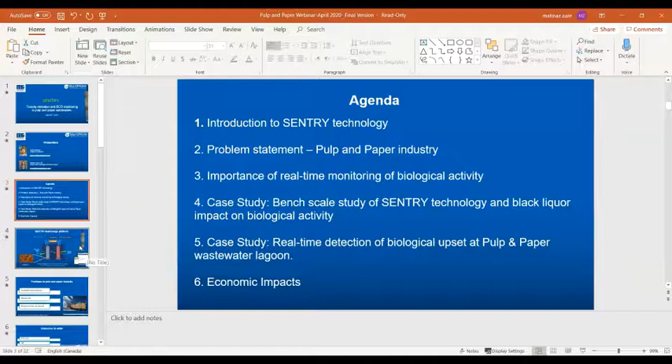So Sentry is a bioelectrochemical system in which power is applied to the system. It has anode and cathode parts. And they are measuring MET, which is the real-time carbon consumption data. The MET data is sent to a live dashboard, and the client has access to the live dashboard. So the redox reactions, oxidation and reduction, are happening at the anode and cathode, and they are producing MET data.

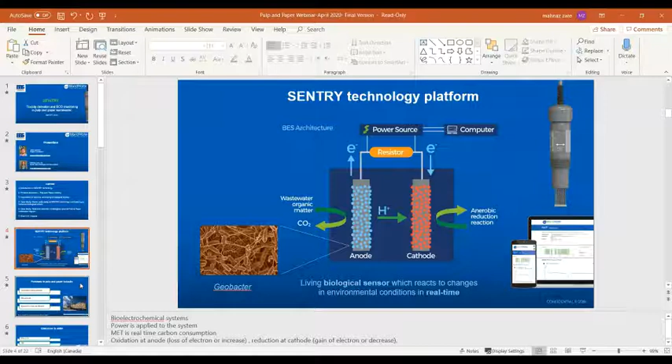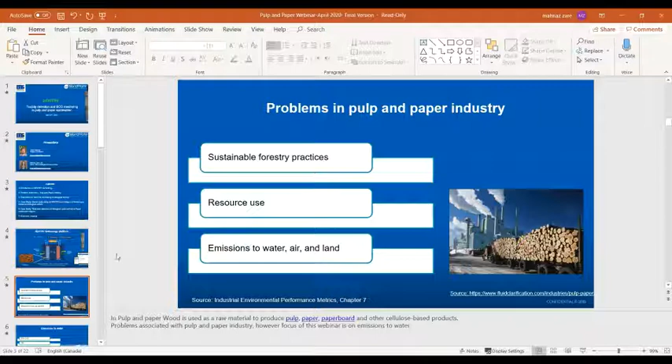In this webinar, we are focusing on the problems associated with the pulp and paper industry. In general, in pulp and paper, wood is used as a raw material to produce pulp, paper and paperboard and other cellulose-based products. But there are 3 general categories of problems that need to be addressed, including sustainable forestry practices, resource use, and emissions to water, air, and land. In this webinar, we are focusing on the emissions to water and the wastewater treatment industry in pulp and paper.

Pulp and paper receives water from a variety of sources in the mill. The processes include pulping, which is producing methanol, power and recovery, which is producing black liquor and turpentine. Another step is bleaching, which is producing caustics, acids, and color bodies. And the paper machine process, which is producing fiber and starches.

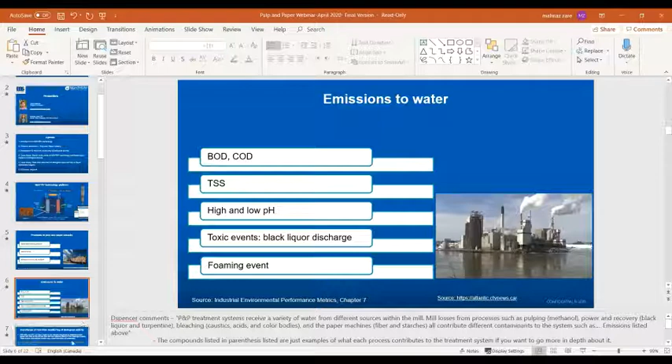All of these processes contribute different contaminants to the system. These are usually measured as BOD, COD, TSS, high and low pH, toxic events including black liquor discharge, and foaming events. So it is very important to control the wastewater and the contaminants that are going to the environment.

However, pulp and paper mills are running 24/7 throughout the whole year, so it's virtually impossible to find out when the issues are happening in the process and if these issues are having an adverse impact on the treatment system.

In order to run a successful and steady biological process, it is important to monitor the 8 growth pressures, including food, such as BOD, pH, temperature, dissolved oxygen, nutrients such as nitrogen and phosphorus, retention time, toxicity, and the health of biomass. However, the known and unknown events may cause variation of the characteristics of wastewater, and these changes can add additional costs up to $200,000 to the treatment system.

Some of the additional costs include supplemental nutrients, bioaugmentation, or adding other products to help avoid potential BOD breakthrough to the effluent stream and violating permit discharges. However, currently there are limited tools available to monitor the biological activity within the wastewater treatment system.

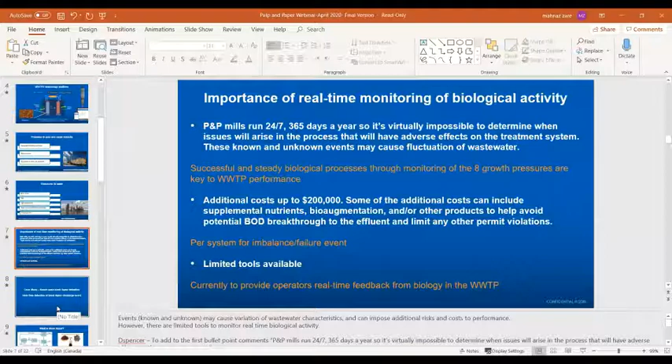Sentry is one of these tools that is helping to monitor biological activity in real time in wastewater treatment. And in this webinar, we are presenting 2 case studies that have used Sentry. The first one is a bench scale liquor detection, in which EBS used Sentry to monitor detection of black liquor discharge in their lab setting. So David, it's to you.

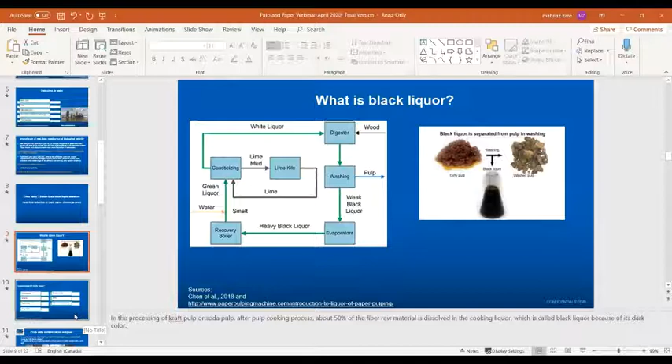However, some of the recovery processes don't always work as planned, and accidentally liquor can end up entering the treatment system, which can have some profound effects on the health of the biology and the overall treatment capacity. Some of the components of the black liquor consist of wood lignins, tannins, resin acids, fatty acids, excess sodium, sulfur, and a variety of other toxic compounds. It's highly caustic and is characterized by high inorganic and organic loads. And because of that, the spills can often cause a period of upset conditions and potentially push the BOD beyond your aeration capacity in the system, leading to permit violations.

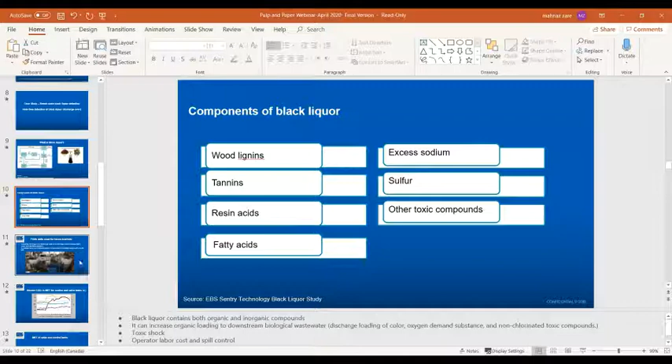So for our bench scale analysis, our overall goal was to quantify the impact of the black liquor spill on the microbial electron transfer compared to what we were normally getting, and also to validate Sentry as a real-time solution to detect these extreme loading swings, such as black liquor spills or any other spills that may occur.

So to achieve this, this is our setup we had in the warehouse. It was two tanks filled with 25 gallons of pulp and paper wastewater. They were fed a flow of approximately 12 gallons per day, so we're roughly at a 2-day retention time under aeration. We ran this setup for approximately a month before starting the trial. And each day we consistently ran total and soluble COD and BOD and compared it to the METs to get a baseline of what normal was.

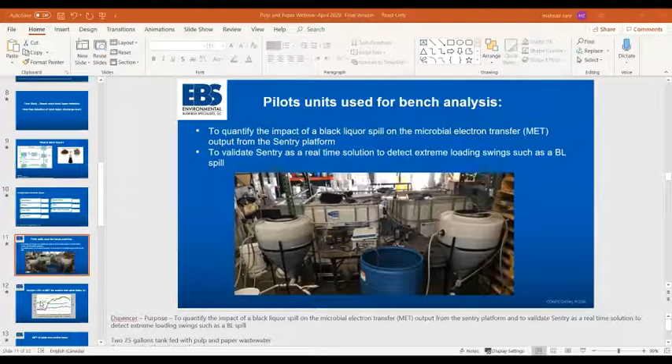So once we established that portion of the analysis, we added weak black liquor from the same paper mill that we would get the wastewater from, just to see how it would compare to the control tank. So we fed black liquor to tank A, and the control remained the same, normal loading, normal flow as it had.

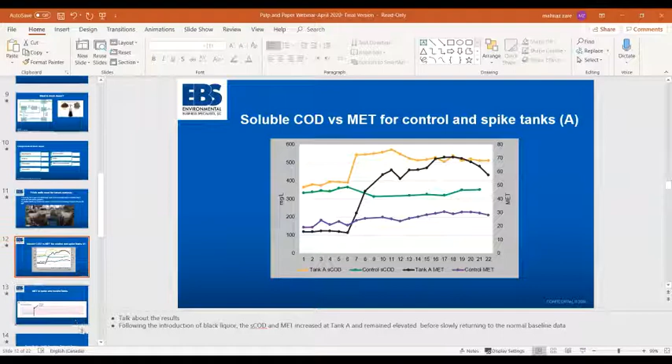And as you can see on this graphic, tank A is the orange. So we ran CODs, and almost immediately, as soon as we spiked the tank with black liquor, you saw a sharp increase in both the CODs and the METs, which indicated it responded well to the increased loading from the black liquor. It remained elevated for a few days and then slowly declined. In comparison, the control tank, which nothing was done to, remained relatively consistent.

This next graph is the dashboard view, and you can see where the dosing event was. The line in blue is the tank that was fed with the black liquor. And as mentioned earlier, you saw a pretty immediate spike, indicating that there was some higher loading coming through, whereas the control remained relatively stable. And then after a few days, the spiked tank eventually came back down, whether through retention time or the black liquor being degraded, back within the stable readings.

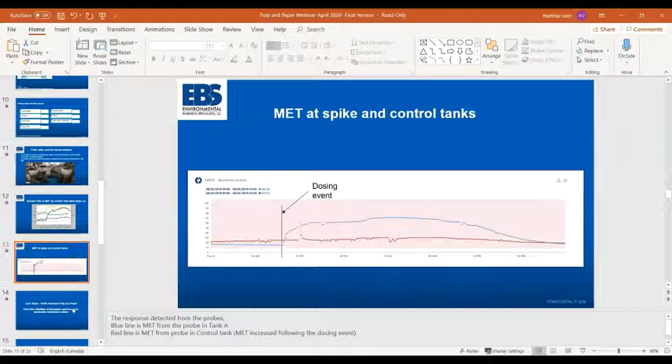So the second case study with Sentry was to monitor real-time biological activity in the lagoon, and to see if Sentry can be used as a real-time detection to help operators detect biological upsets at the lagoons. The base mill is located in North America.

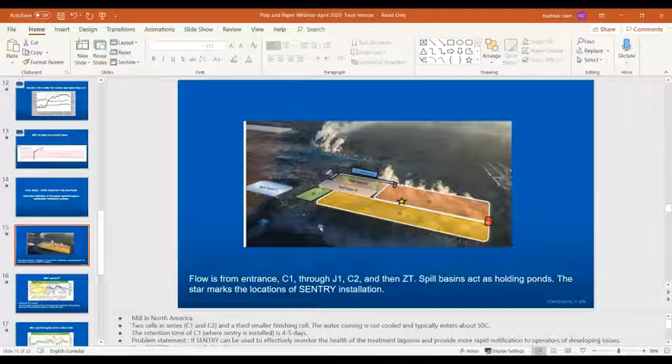The picture is showing the aerial view of the wastewater treatment. There are cell C1 and C2, and ZT. The water is flowing from C1 to J1 and then C2 and then ZT, which is acting as a smaller finishing cell. There are 3 spill basins, spill basin A, B, and C, which are acting as holding ponds. The star here is showing the location of Sentry installation.

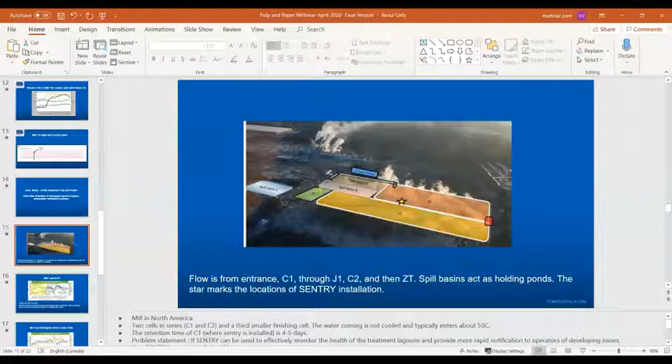C1 and C2 are in series. The water which is coming to the lagoons is not cooled and typically enters at around 50 Celsius degrees. Only one Sentry system is installed at C1. It has a retention time of 4 to 5 days. And as mentioned earlier, the problem statement was to see if Sentry can be used to effectively monitor the health of the treatment lagoons and provide more rapid notification to operators about developing issues.

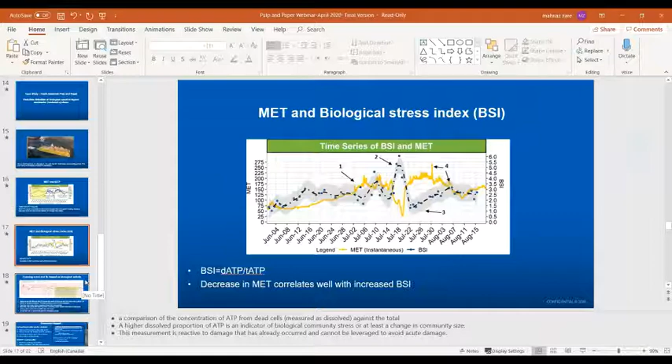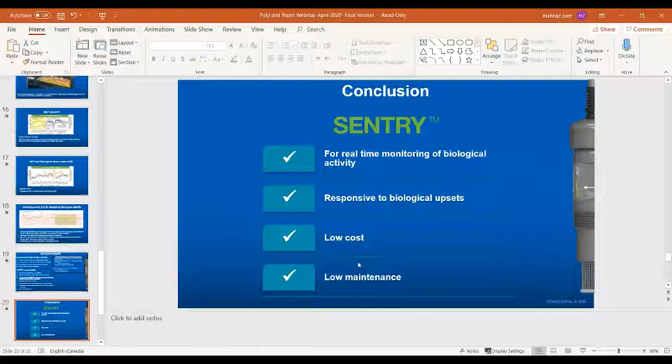So I'll maybe just try and quarterback the questions and the next steps. I will summarize briefly to remind people of what we've gone through. So generally speaking, the pulp and paper industry has massive issues in having to deal with wastewater. The wastewater generated at these pulp and paper sites, let's be honest, it's not what you'd consider nice wastewater. It's cellulosic type compounds that are really hard to break down biologically anyway. And then you couple that with all of the toxicity that's inherent in that wastewater stream.

So the operators of these facilities really have to be on the ball. They really have to understand what's going on in their lagoons or their treatment systems. So having your finger on the pulse, having a real view on the biological activity is central. The first work we did with EBS was all around helping them understand, can we identify these black liquor spills? It's those spills of black liquor that really cause significant issues. So if we can help the operators understand when those events are happening in real time, that can be a real positive step for the operations of those facilities.